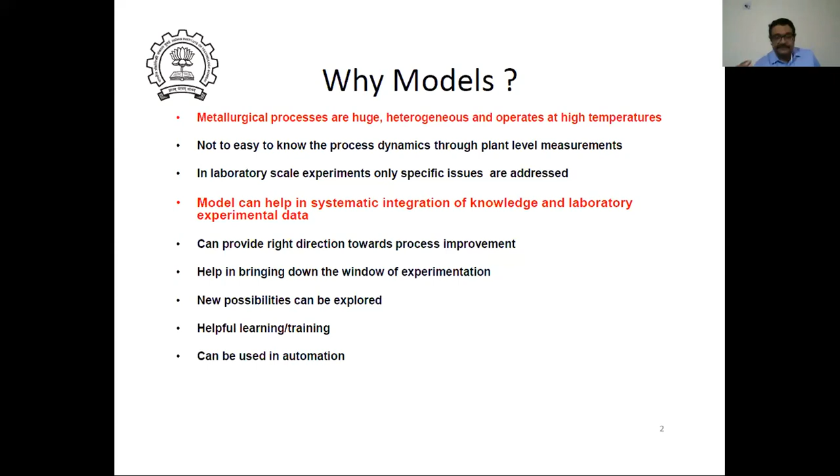That's why there is a very famous chemical engineering professor, Rutherford Aris. He talks about how conceptual progress happens in our brain as we make a model, and then the actual understanding about the system improves the system itself. So it's a play between these two, as he says. And this is one of his very important statements.

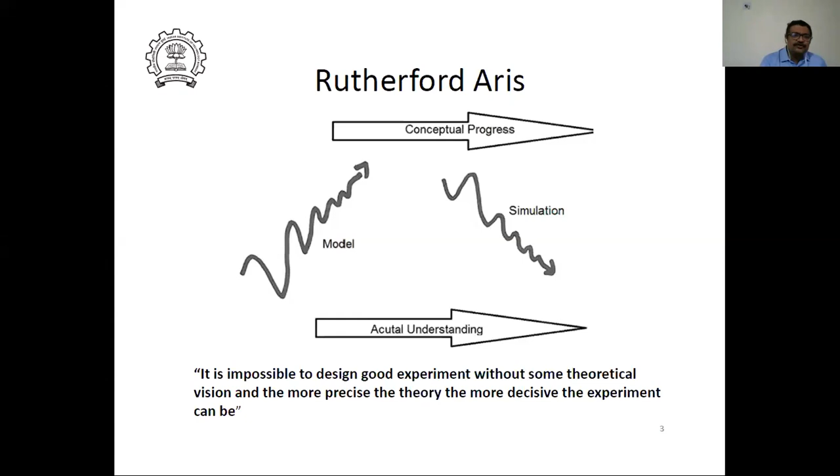He says it is impossible to design a good experiment without some theoretical vision, and the more precise the theory, the more decisive the experiment can be. So if your theory is better, you can actually do a more focused experiment. I will show you some of these things through my presentation.

Of course, he also comes up with his so-called maxims of modeling. He has many of them.

Nowadays many youngsters get into this—we have a lot of tools available, especially CFD tools like ANSYS Fluent, OpenFOAM, or CFX. We would like to simulate many things, especially flow, heat transfer. Quite often a beginner would like to put all the complexities involved in the system into the model right from the first one they develop.

He says that is one of the worst ways of doing modeling—avoid rigor like the plague, it only leads to rigor mortis. That means if you put too many things in, the model becomes so inflexible that it will not move; it will be like a dead body. That's what he means by rigor mortis. So one has to be careful about this.

We have a lot of tools available, but again, when we do modeling, we have to do it step by step. Anyway, these are some of the things I thought I could share before I talk about modeling.

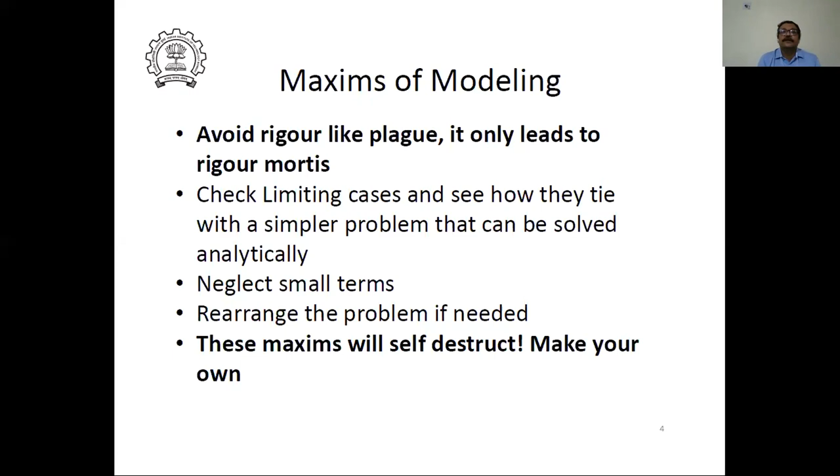As far as the principle used in process modeling goes—this is really what the whole science is about—we have conservation equations and constitutive equations. Conservation equations are, for example, conservation of mass, conservation of energy, conservation of species. Constitutive relations describe how a particular thing behaves.

For example, how does steel behave under tension, under stress? Similarly, how does an iron ore behave when you put it in a CO atmosphere? These are laboratory experiments that can be done, and from there we get the so-called constitutive relation. So basically modeling, in a generic sense, is combining these constitutive relations through conservation equations—using principles of thermodynamics, heat, mass, momentum transfer, and reaction kinetics.

Of course, modeling doesn't only mean computational or mathematical models. We also make physical models to understand things, and information from those can also be used.

Quite often there is confusion between model and simulation. Most of us are probably not modelers—we are all simulators, because somebody has already developed a model and we only use those models to simulate something. So whatever we do in Fluent or anything, I would like to call it more a simulation rather than a model. A model needs much more in-depth understanding.

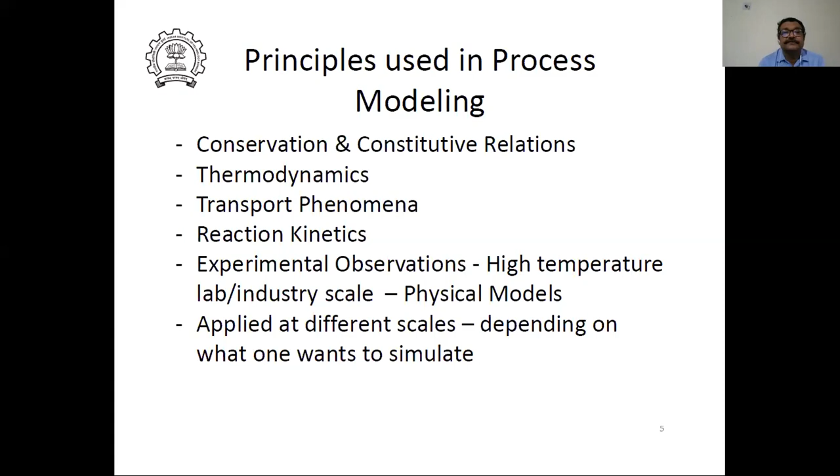But anyway, let me start from pelletization. This is the work I did when I was an LKAB chair professor in the northern part of Sweden, where they have a lot of magnetite ore, and this involves induration—magnetite induration. They make pellets and wanted to look at the process. I don't want to get into the details; many of you will know what a pellet indurator is—you make pellets and then heat harden them.

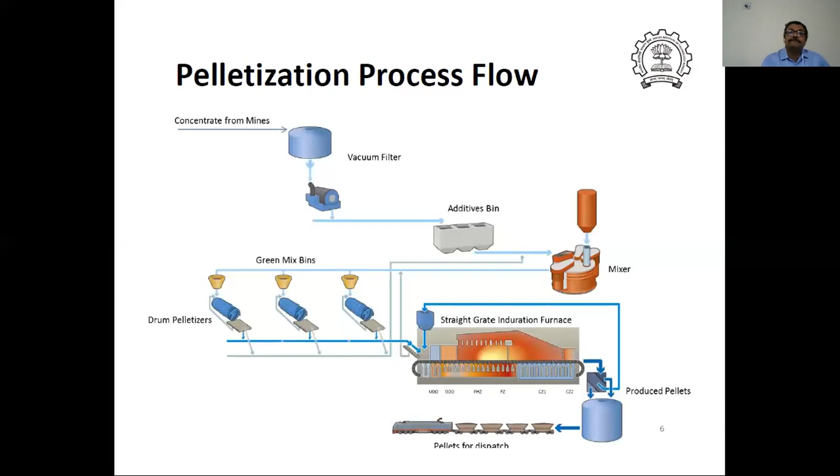So what was the motivation for doing this problem was, if you look at the whole reactor, the induration reactor, there are two kinds of reactors, straight grate and the kiln one. So if you look at...

Because this is actually a moving bed, and the pellets are stacked in a bed like this, the properties of the pellets can vary from top to bottom. The temperature and gas composition the pellet encounters is not going to be the same throughout the whole section of the bed, so the quality of the pellet varies. Of course this is even true for sinter also, the quality of the sinter varies across the cross section for the same reason.

There are already models for the reactor and all those things, but they don't really have a model which can predict the pellet quality. So hence I was asked, as a professor in that university, if I could look into this problem of how to address this quality. Can some tool be developed so that the quality can be assessed? That was their request.

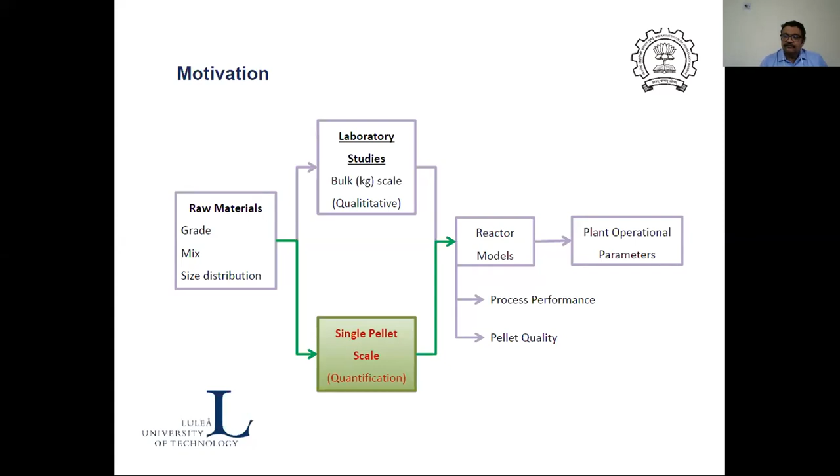So then I said, okay, we have to look into a single pellet to understand, for different raw material mix, different grades, how do you go about understanding the single pellet? That's the way we started working on a single pellet. This was one PhD student who worked on it, so I'm presenting his work.

If you look at a single pellet, magnetite pellet, what we do with the hematite is different, and we have started doing that now at IIT Bombay. I have a PhD student who will be working on that. But on the magnetite pellet, the magnetite gets oxidized, and then it also gets sintered.

Of course, the sintering can happen both for magnetite as well as the oxidized magnetite, which is hematite. Interestingly, the sintering characteristics of the oxidized magnetite is different from the magnetite itself. Rather, what happens if you take a pellet, it starts oxidizing from the outside, and you have an unreacted core which is magnetite. As temperature increases, this will sinter separately, and their sintering characteristics are different.

Magnetite sinters a bit more easily compared to hematite. So sintering leads to shrinking of the pellet. This unreacted magnetite, which is yet to get oxidized, will start shrinking, and the hematite will not shrink that much. So then one can develop a crack in the magnetite pellet inside. Rather, if you take those pellets and shake them, you will hear a sound like a coconut - sometimes you will get a duplex structure.

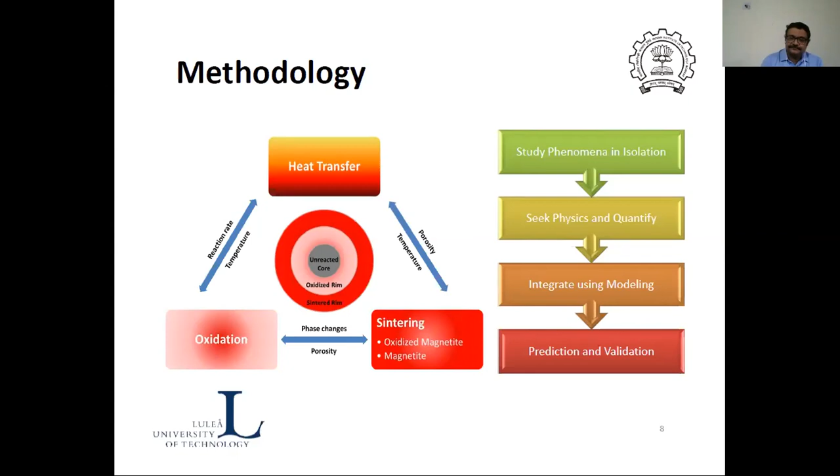So what we did was, we know that sintering leads to shrinkage. So we actually did a very simple experiment called the heating microscope, which I think many of you may be aware of. For example, if you want to find out ash fusion point, you take a small pellet, put it inside that heating microscope. There is a light source, and you get a shadow image, so that way you'll be able to capture how the size is changing, and from there you can find out when it is going to soften, etc.

So we took the same system. Of course, we asked them to make it a bigger system, so that we can put a pellet which is of 10 to 12 millimeter size. So that way we put it inside the furnace, and then you heat it. There are ports, windows, and all those things - you have a light source and capture the image.

As the temperature goes up, the pellet expands and gets sintered. This was done by some scientist back in the 60s or 70s, but afterwards no one continued to use this. They were using another technique called dilatometer push rod, which has its own problems - I don't want to get into it. But we thought this is a much better system, so we worked on this one.

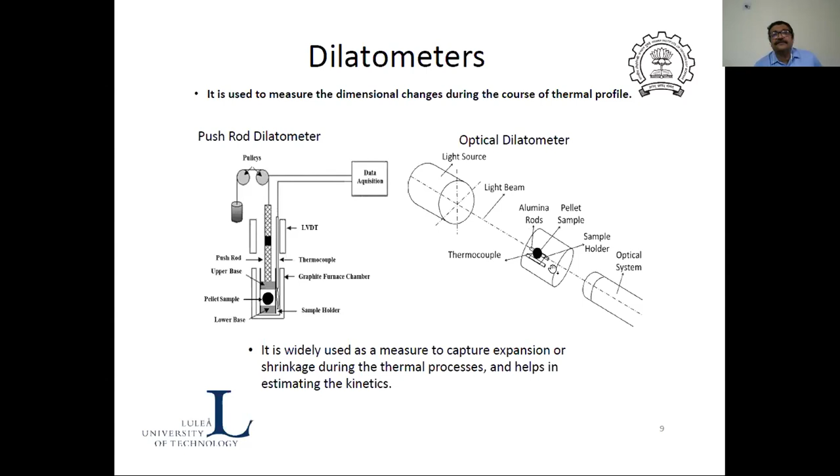Though it is a heating microscope, we call the name optical dilatometer. We have published at least 3 articles in Metallurgical Transactions on this particular methodology.

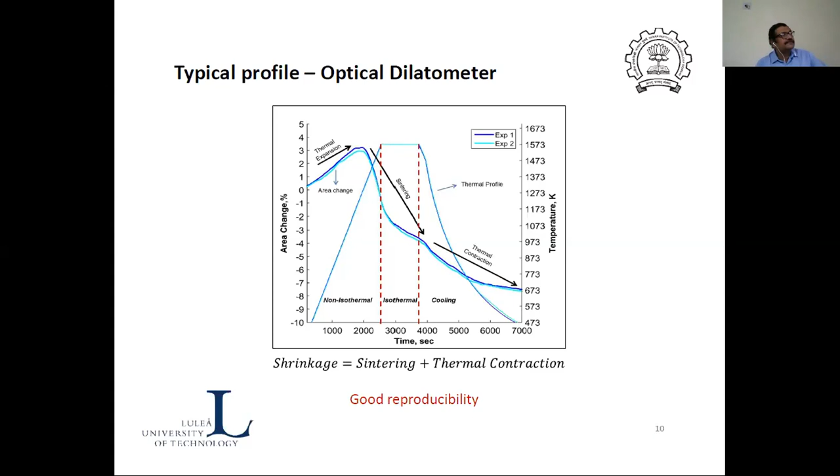So basically, it is a typical curve which we get from the optical dilatometer. Of course, there are two phenomena happening - one is the expansion, the other is sintering. Actually, one can very easily eliminate the expansion, because if you plot with temperature, you will see that expansion is more or less linear with respect to temperature.

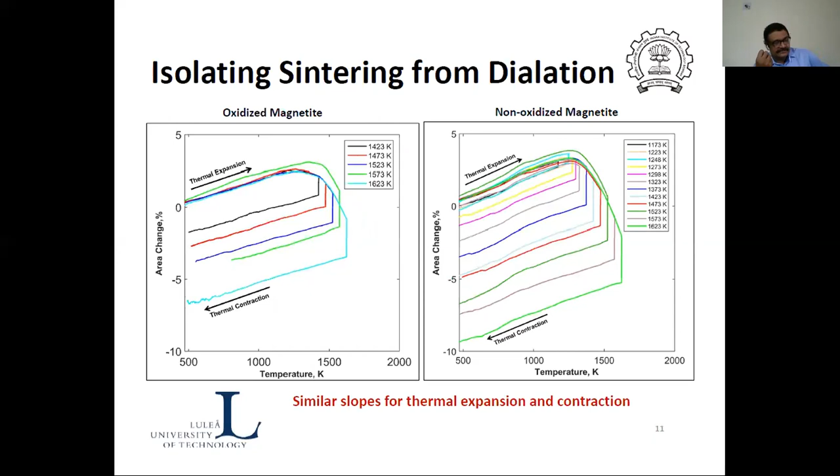So instead of time, I just plot with the temperature. You can see that this is expansion and this is contraction again during cooling. So I can very easily eliminate that, and I can actually get what is the change in the pellet size only due to sintering. And that is what we used.

Sintering is not something uncommon to a metallurgy community. In powder metallurgy, a lot of studies have been done on sintering - they have done so many experiments. They use a parameter called sintering ratio. Again, I don't want to go into the details of it, but this can be derived out of those experiments.

We conducted experiments for different temperatures, both for the magnetite as well as oxidized magnetite. When we oxidize the magnetite, we don't want sintering to happen, so what we did was oxidize it very slowly - meaning at a low temperature where sintering will not occur. We kept it for 2-3 days in the oxygen atmosphere so the magnetite would completely oxidize. We checked it - completely oxidized.

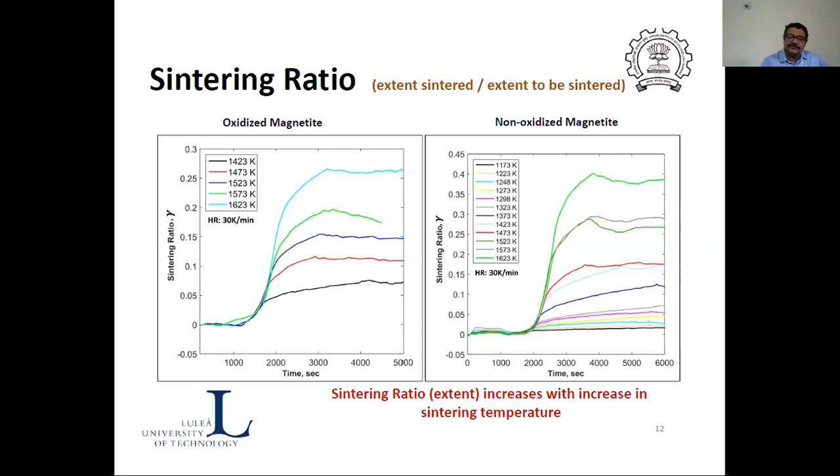And then on that pellet, again, we conducted the sintering studies. So these give us the sintering ratio. And then again, we looked at powder metallurgy literature. There were actually very nice equations which describe how the kinetics of sintering can be - of course, metallurgists would have studied in powder metallurgy the different stages of sintering, the different mechanisms, and all those things.

But as far as iron ore sintering is concerned, we are only at the first stage because we want the pores to be there. So it's basically the first stage of sintering, but in actual powder metallurgy there are more stages. All these equations were already developed.

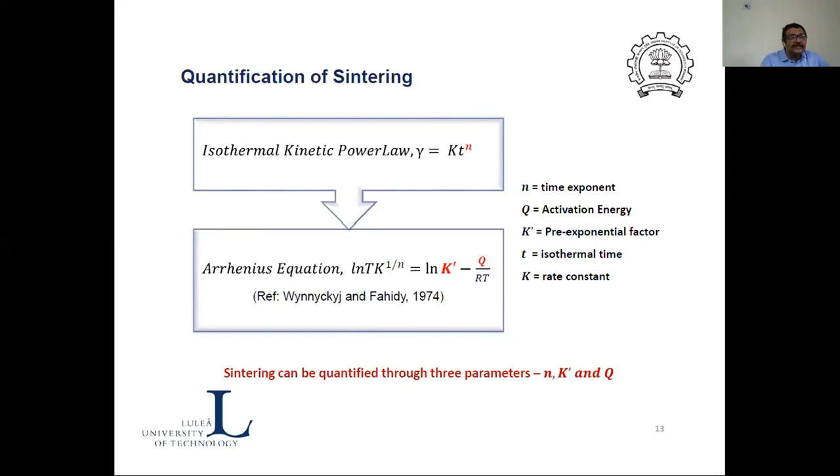The most striking thing was when we just put all that equation together, we saw that all those experimental points beautifully converged into one line, which clearly showed something. This was the moment we were so happy - we could see that, borrowing from our friends in powder metallurgy, we could actually quantify sintering.

Till now, no one was actually quantifying sintering in pellets. That was the sad part of it, because people did not look to quantify the sintering. And we could see that it was so beautifully coming in one line.

Of course, then we analyzed what is the activation energy, what are the reasons for it. Academicians have their own reasons to find - for example, Fe3O4 sinters much more easily compared to Fe2O3. That is one of the reasons - Fe3O4 is a non-stoichiometric compound, so it has more defects in it, and hence diffusivity is higher, so it can actually sinter more easily compared to hematite.

So some of these insights were coming once we started doing these experiments. This was a very nice experiment, and we could actually quantify sintering. Now what is the use for industry? Industry is basically - we have come out with some kinetic parameters.

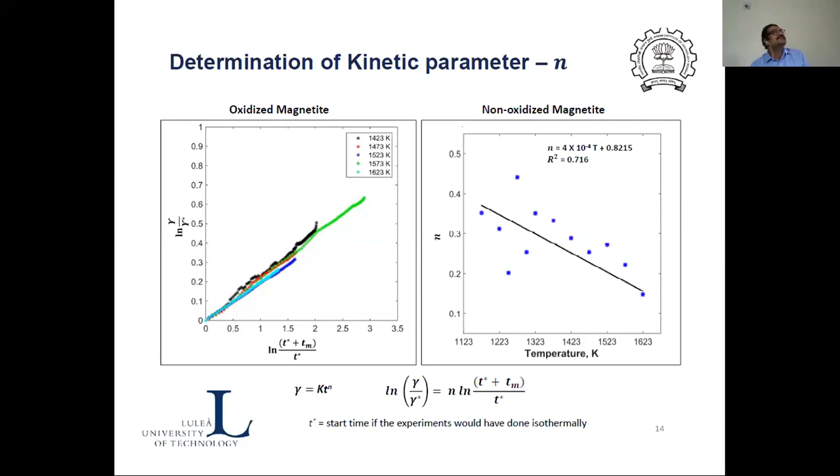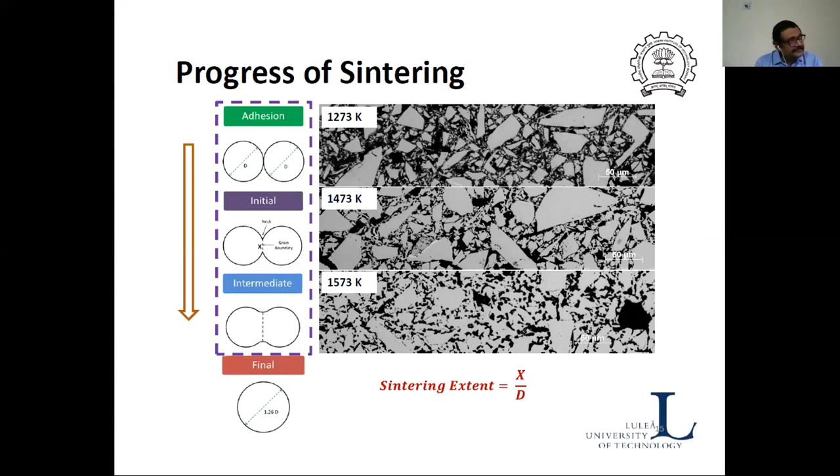Of course, we also analyzed the microstructure and all those things. As I was telling you, this is the neck formation in sintering, which in powder metallurgy is well known. So we analyzed the microstructure and looked for bridges. We had a collaboration with a computer science professor who works in image processing.

What we did, for example, this is the image of a single pellet, but actually it is not one image. This is several thousands of images stitched together, and we obtained the whole picture. From this picture, again looking at the bridging and using image processing, one can find out what the sintering degree is. So we saw that what we physically observed by shrinking can actually be correlated.

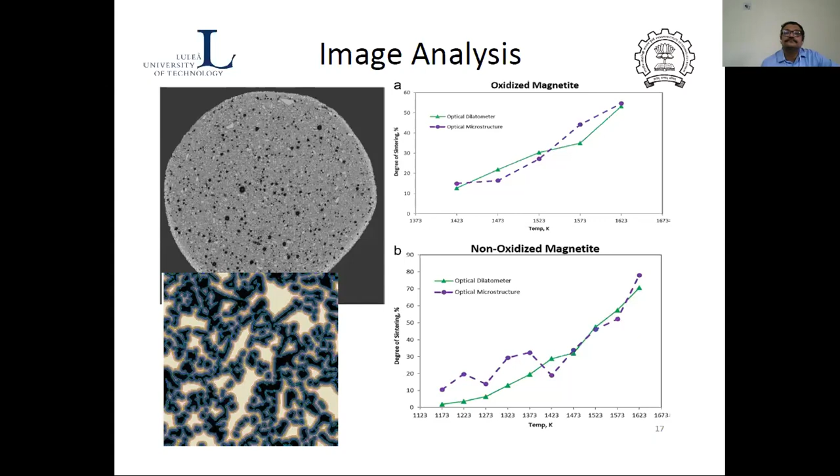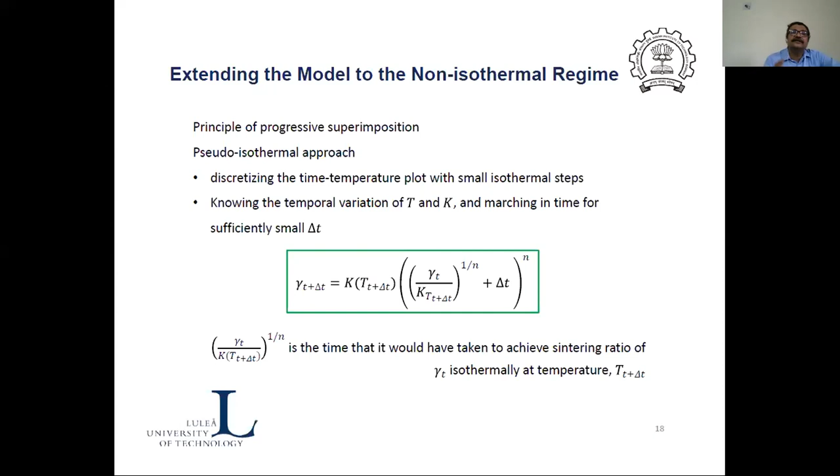Then we expanded this model, because all the studies were conducted in isothermal conditions. So we expanded the model to non-isothermal conditions. Of course, these involve some modeling techniques, but they are not very difficult things, and they are used in many other places. For example, in grain growth, when you do runout table processing, if you want to predict the microstructure, there are equations available.

Along the same line, we developed the model, and we conducted non-isothermal experiments to see how good our predictions were in matching with the experiments. You can see these are some of the predictions, and the experimental results, and it's a very nice match between what we found experimentally and what the models predicted. So it's a judicious combination of experimentation, especially focused experimentation, that can give much better information and result in quantitative information.

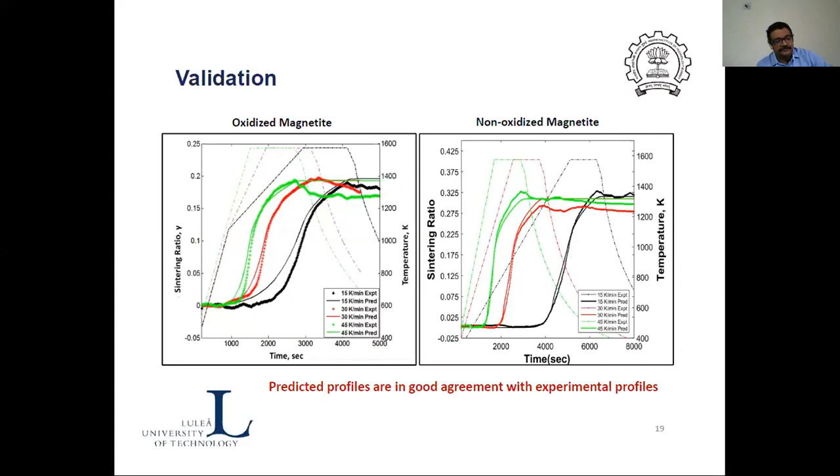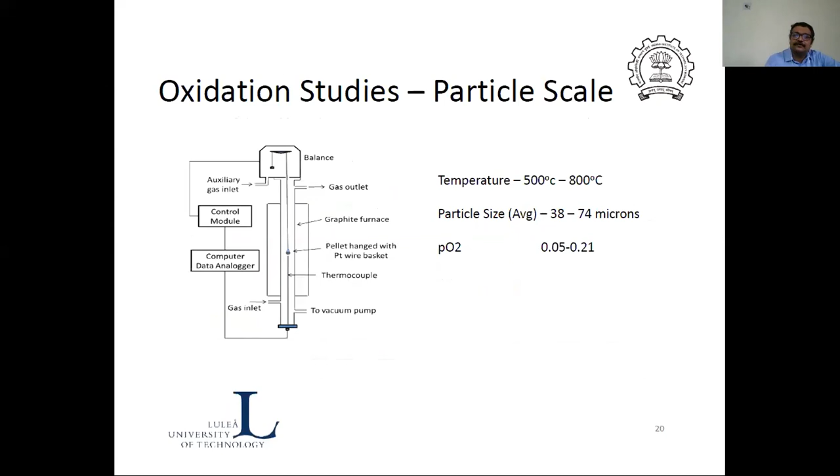This is one part where it is only sintering. Then we also went ahead with oxidation, where we conducted TGA experiments. I don't want to go into the details, but we did all those studies also. We looked at single particles of magnetite, which are there inside the pellet, and we looked at the microstructure.

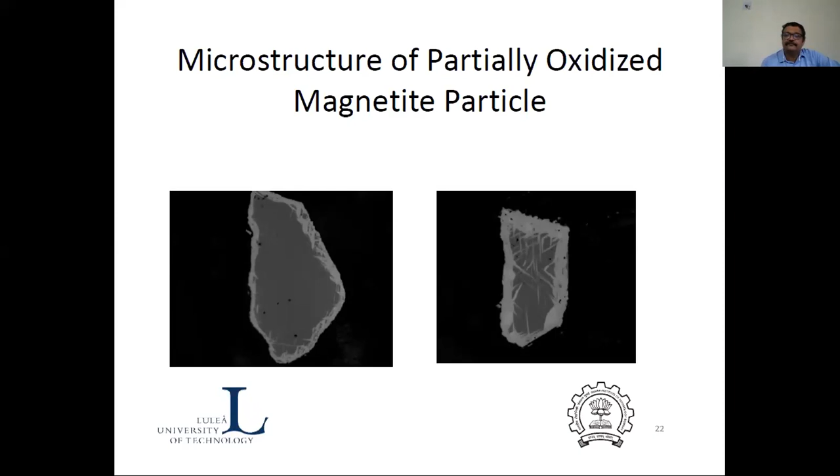For example, this is the way hematite grows, the needles of hematite coming in. So again, we used principles from phase transformation to understand this, and there is something called the Avrami equation. Some of you may be familiar with it, and we found that the Avrami equation fits very well. Again, these are experimental observations fitted with the Avrami equation.

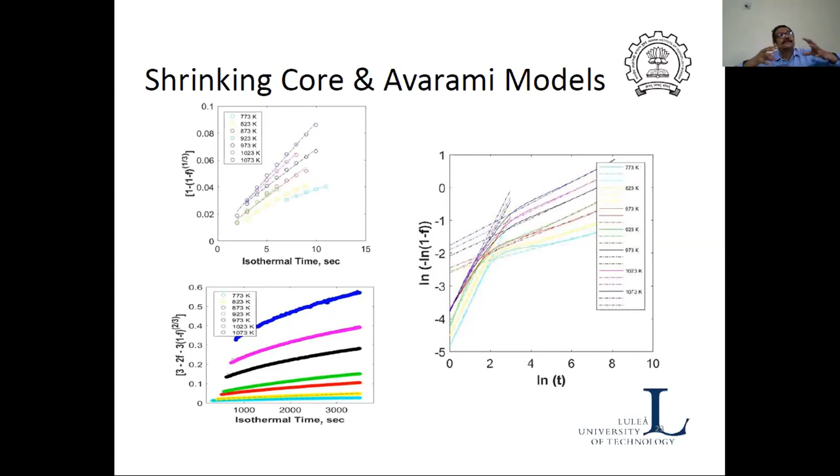So that way we were going across different scales. One is the scale of the grains which are there in the pellet, then the pellet scale where diffusion happens, and at the grain scale, this phase transformation or oxidation was happening. So again we used the principles of diffusion, reaction kinetics, and conservation, and then we could develop models.

So for example, this is the model versus experiments, and it's a very good match. That way we could quantitatively predict the oxidation, and we could quantitatively predict the sintering. So that way we studied the phenomena in isolation.

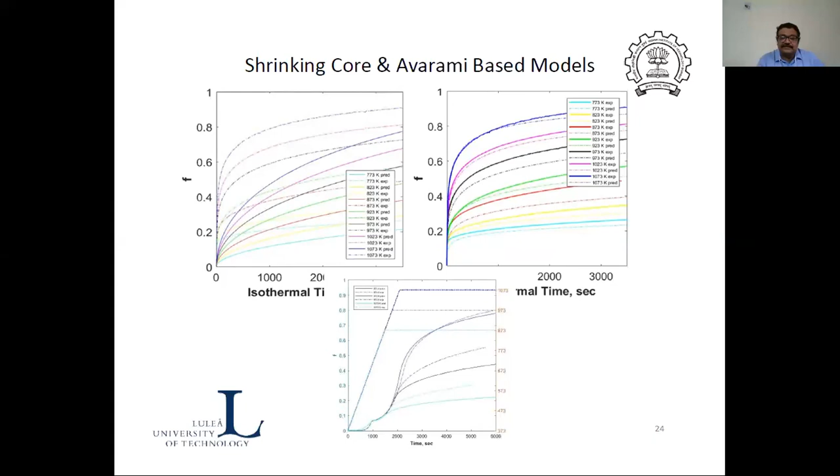Now we can combine these two, because sintering affects the oxidation - once sintering happens, the voids get closed, so the gas cannot reach. And of course, depending on whether it is magnetite or oxidized magnetite, the sintering is going to change. So oxidation gets affected by sintering. Hence now, once we know them in isolation, we can use the principles of modeling to integrate them, and that's what we did. And there is also an associated heat transfer, so now using the principle of modeling, we can actually predict.

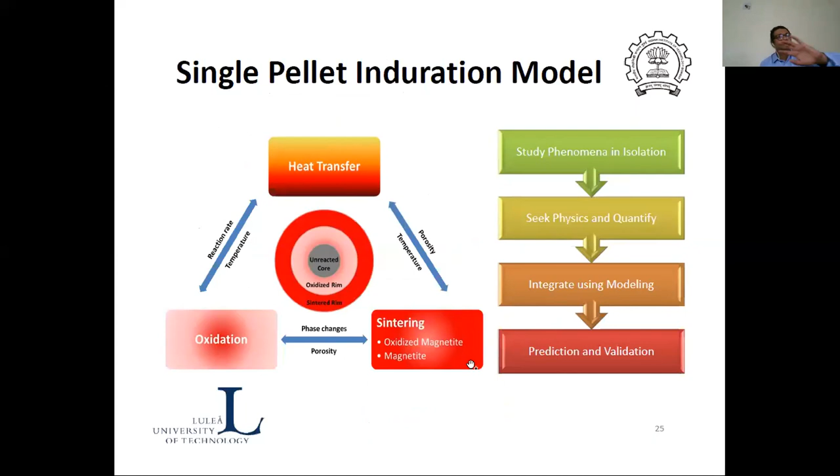If you look very carefully here, this is how the oxidation progresses. You can also see the pellet shrinking. If you look at the pellet here, and by the time it has come here, it has already shrunk. So we developed what is known as SPIM, the single pellet induration model.

LKAB is using this SPIM model in their actual reactor model, so they can predict the quality of the pellets across the cross section. Of course, they have to conduct experiments whenever they have a new mix to find out the kinetic parameters. Once they find the kinetic parameters, they plug those values into the model and put it into the reactor scale model. That way they can assess how much shrinkage has happened, what the oxidation front looks like, and from there assess the quality of the pellet. So some quantitative information they are able to get from this model.

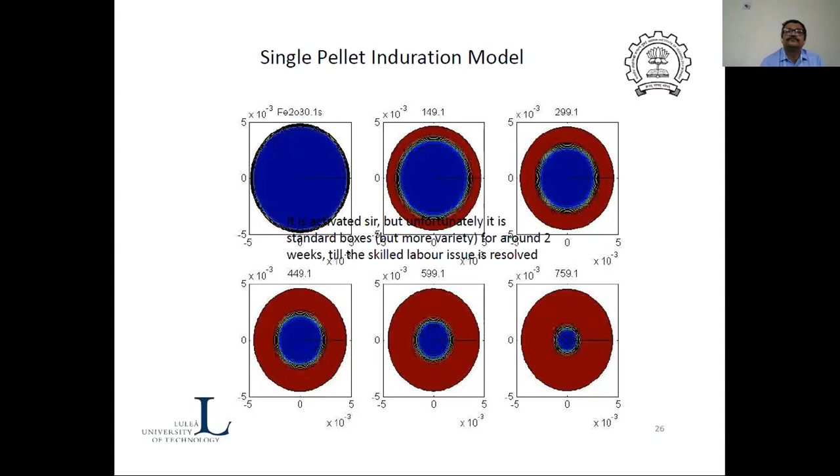So that is as far as LKAB is concerned. I was not involved in the reactor scale model. Then I came back to IIT Bombay, and here I was very much interested in pellets.

We always have students coming from industry who are interested in various iron and steel making processes. So I got involved with one of the industries who wanted to look at the temperature profile in a straight grate induration furnace. Of course, this is not a magnetite induration, but a hematite induration furnace.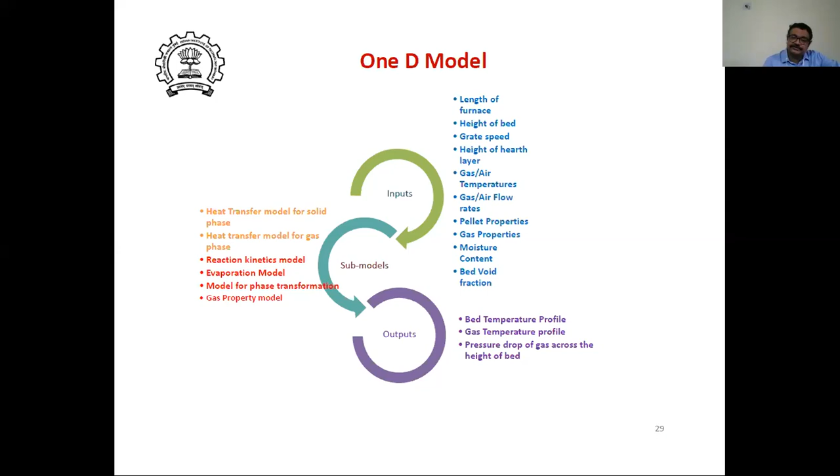From there we can predict the bed temperature, the pressure profile, and all those things. For example, this gives the temperature profile. Because the hot gas comes from the top, the pellets on top spend more time at high temperature compared to the pellets at the bottom, which spend relatively less time at high temperature. The residence time is different for these pellets versus those pellets, so accordingly the quality is going to be different for a pellet here versus a pellet here.

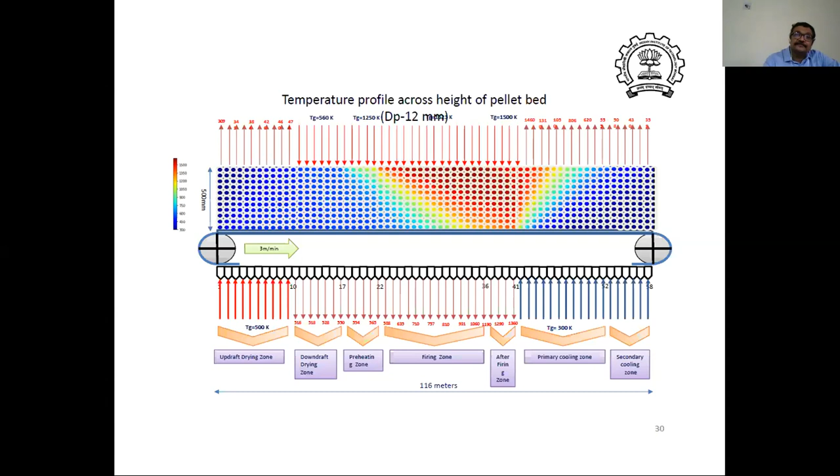The most interesting thing we got excited about, which I am not able to show but can tell you, is the temperature profile for different pellets - those sitting at the top versus the middle versus the bottom. As it moves, a pellet at the top experiences a different temperature than a pellet at the middle or a pellet at the bottom. So that's the temperature profile.

Then in industry, they use a technique called thermocar. What they do is put a thermocouple, and not only a thermocouple but also a data logger, in one of the pellet cars. This whole system has to move through the entire induration furnace, so it's a very costly setup because they have to make sure the data logger is well cooled - otherwise at these temperatures it will not work. So it's a sophisticated system with a lot of cooling arrangements.

So they put this thermocouple plus data logger system into the car, and by the time the car comes out, the data logger can be taken out to see what the temperature profile was.

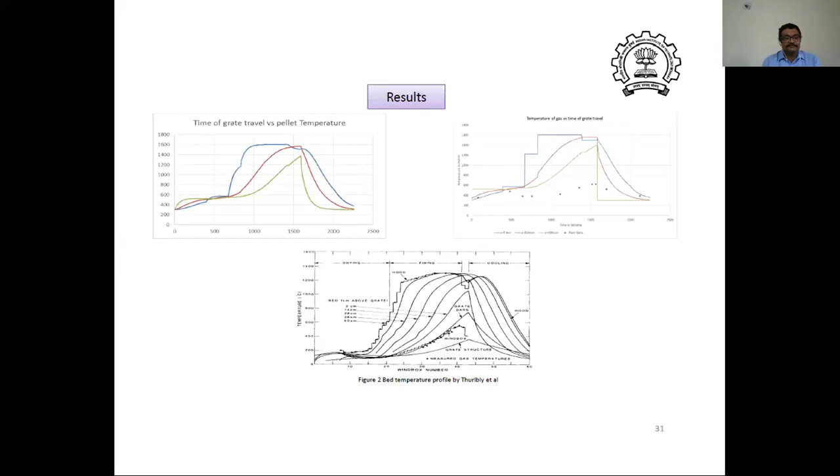So this one experiment cost around 60 lakhs. Plants sometimes do these kinds of experiments to understand the temperature profile inside the furnace. For reasons of confidentiality, I can't show those points, but whatever we did, without even much tuning, the temperature profile matched with one of these profiles so nicely. So now we have established the confidence that the model can predict actual plant temperature data. Tomorrow if I change the gas flow rate, the gas temperature, or the production rate speed, how those things affect the system can be studied with a simple model. Once we establish that confidence, it can be used often and save a lot of money, because doing experiments at such large scale can be quite expensive. We were quite excited to see that it matched well with the experiments, that too at the plant level.

So that is as far as pellets are concerned.

How much time do I have? Still half an hour, sir. Still half an hour? Okay.

So now let me go to the next topic, which is blast furnace. Blast furnace has been my love.

I wanted to do even my PhD in blast furnace, but unfortunately during my PhD there were a lot of issues with cupolas. Maybe some of you may not know, at that time a lot of cupolas were closed because of pollution and such issues. So my supervisor asked me to work on cupola. Probably that is the last PhD work on cupola in the world.

I worked with Professor Lahiri, again a pioneer in modeling, at the Indian Institute of Science. So that way I wanted to work in blast furnace, but I started with cupola. But my love for blast furnace did not leave at all, and as soon as I joined IIT Bombay I started working on blast furnace. And I continue to work even now on blast furnace.

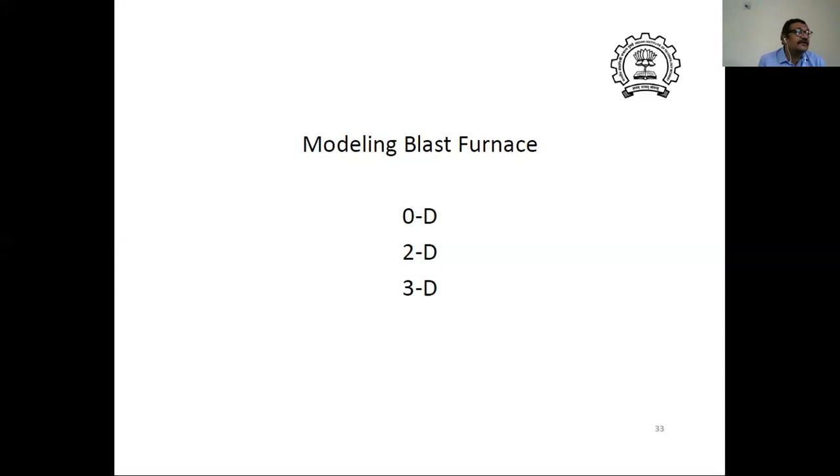So let me start with the 0D model. I don't know how many of you are aware, but one of the great books to study blast furnace, to understand blast furnace, at least from my personal recommendation, is the book by Peacey and Davenport.

It's a beautifully written book without any ambiguities regarding blast furnace. If you look at it, blast furnace has been challenged by many reactors. But let me tell you, blast furnace has stood the challenge of time, and even now, blast furnace will remain as the main iron producing unit, though people are trying different ideas, and there are reasons for it.

Blast furnace, one of the words we use to describe it is chemically and thermally efficient reactor. These are the two words which describe blast furnace, and they are used for a particular reason.

Why it is thermally efficient is that gas is going from bottom to top, and the solids are coming from top to bottom. When you have such a flow, the heat transfer is maximum when both phases reach the same temperature, because after that it cannot transfer any more heat. In blast furnace, such a region exists, which is called the thermal reserve zone, where both the gas temperature and the solid temperature reach the same. That way, it is a thermally efficient reactor.

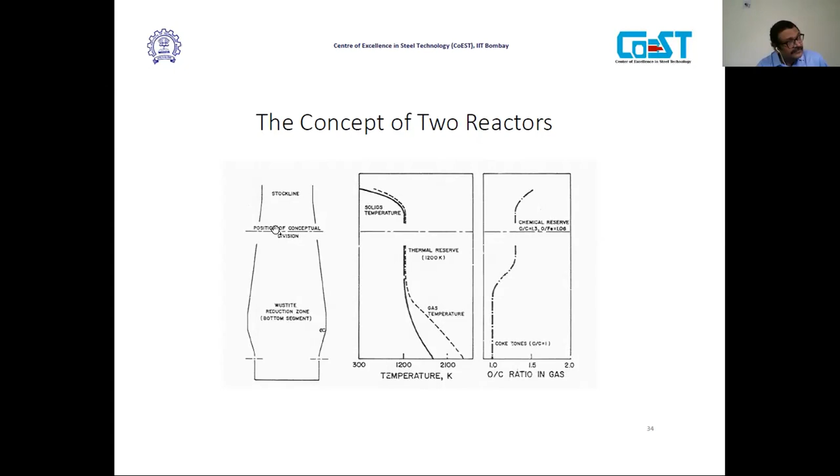Based on that, one can find out, once you have the raw material, the coke you are putting, the PCI you are injecting, other than PCI, hydrocarbon, natural gas, all those things, then what is the minimum coke which is required. That means no blast furnace can operate with less coke for other conditions being fixed, meaning blast temperature, pulverized coal injection, all those things are fixed, and corresponding to that coke rate, what is the blast rate. It's a beautiful, very simple model.

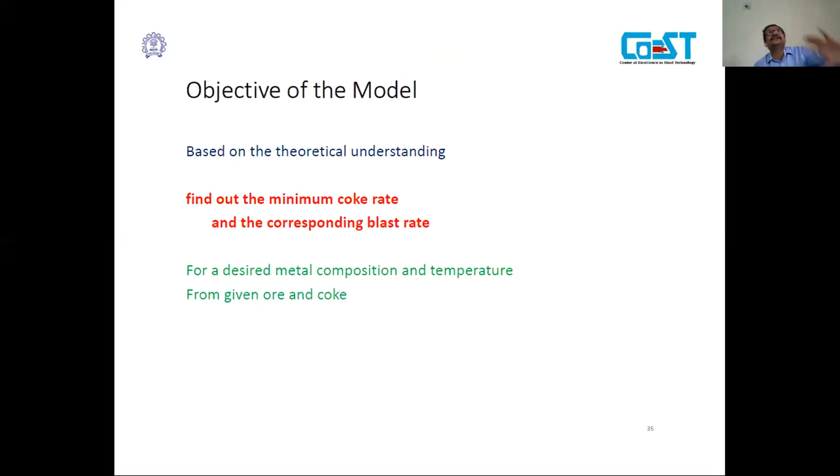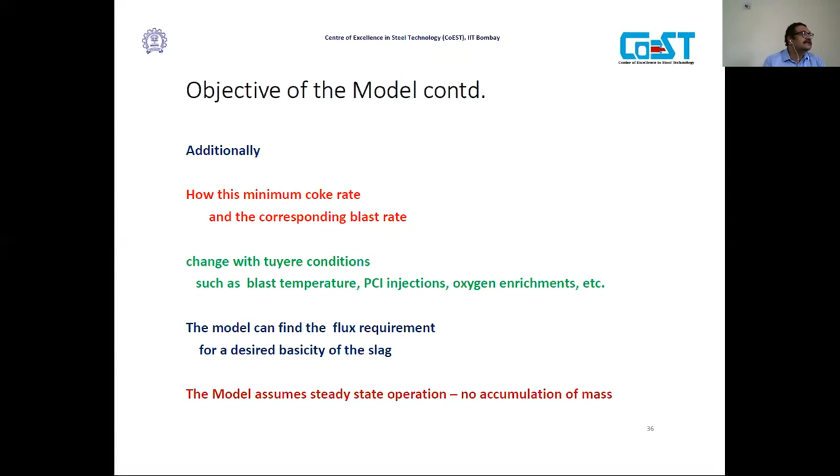This is what Peacey and Davenport's whole book very nicely tells about. I don't want to again go into the model details, but I can tell you, basically the model contains three things. One is oxygen balance, for example, oxygen coming from iron plus oxygen coming from the blast, water vapor, whatever you add, all those things should be equal to the oxygen which is going out through the gas. That's an oxygen balance. There is a carbon balance and there is a heat balance.

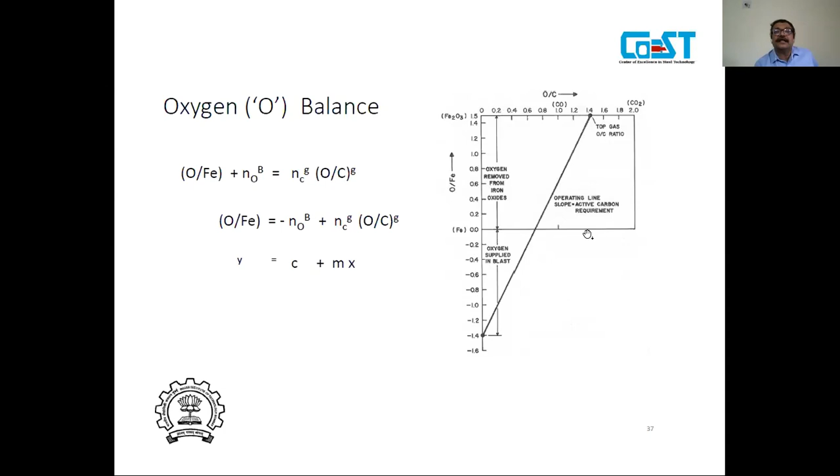Based on that, you can draw what is known as an operating line. This is the oxygen, and this is the oxygen by carbon which is in the gas. This is the oxygen we are giving through the blast, this is the oxygen coming from the ore, and this is the oxygen going out through the carbon, and you can beautifully draw a line. I'm not going into details, but telling you such a simple model, we teach it in the classroom. Students all do it, and we can draw this theoretical line, then based on your top gas composition, what is the oxygen you put in, you can draw another line.

The deviation from this line will give you the efficiency of the blast furnace. How efficient? I can tell you, blast furnace can operate at 95-96% efficiency, almost close to ideal condition.

Now, if I look at many industries, they compare their blast furnace fuel rate or coke rate with furnaces abroad. Actually, this is a very wrong way of comparing. It's like comparing apples and oranges, because the fuel rate depends on the raw material you charge. Our iron ore contains a lot of alumina. To take care of alumina, we add extra quartz, and to take care of extra quartz, we need additional lime. So our slag rates are much more than what is there abroad, in some furnaces outside. So straight away comparing, our coke rates appear much more than their coke rate.

No, we don't need to reach there — I think that is the wrong way of doing things. We need to use these kinds of models, because you cannot get a coke rate better than what this model predicts, since you cannot violate thermodynamics. So your benchmarking should use this, rather than just benchmarking with somebody else's coke rate, because they get much better ore, so they can do it.

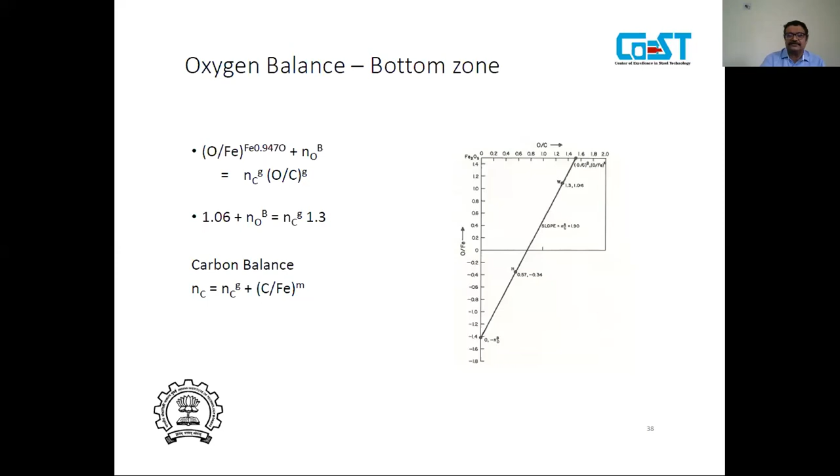This model is something which, I know, ArcelorMittal uses regularly. To some extent, Tata Steel uses it, but I don't think other plants are still using it effectively. This is not a new model — it's as old as 40-50 years. That's what I'm trying to tell you. But still, even though it's a very simple model, we are not using it, and we can do many things with it. For example, this is the ideal line, this is the operating line.

You can also include not only carbon but also hydrogen, because nowadays we are very much interested in using hydrogen, to bring down the carbon emission level. So we would like to put hydrogen-containing things — for example, India may start using more natural gas. I don't know, but these are the possibilities, because we are thinking of natural gas terminals on the eastern coast and the western coast, from where natural gas will be pumped.

These are some of the ideas floated by our Prime Minister, and I know some large companies are interested in it. For example, I myself am working with ExxonMobil, one of the largest suppliers of natural gas. They are interested in finding out the maximum amount of natural gas which can be injected into the blast furnace under Indian conditions, given whatever iron ore, coke, and PCI we get. I can analyze all these things using this particular simple model.

What is the maximum amount, and how much will carbon emission levels come down? All these things can be analyzed — so I'm working on it. Again, I'm not allowed to show some of those results, but I'm trying to tell you it's a beautiful, very elegant model, which I think all plants should be using to look at their blast furnace performance on a regular basis.

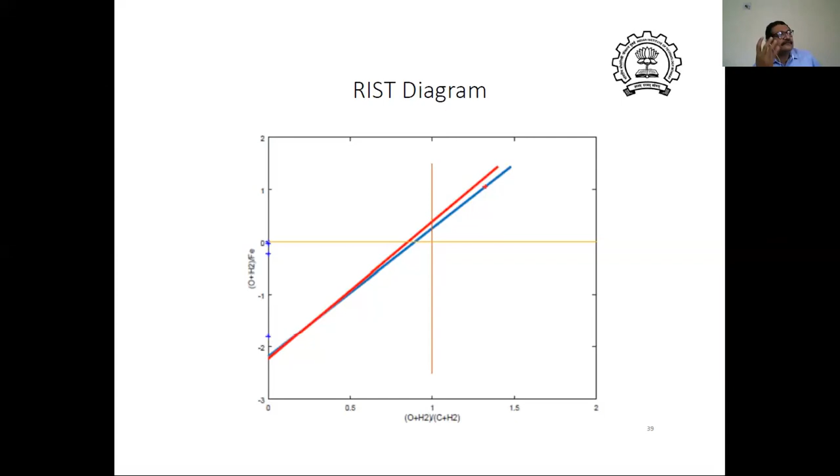So this simple model can be used to benchmark blast furnace efficiency, explore new possibilities, as I told you, and even to look at top gas recycling.

Let me also tell you about one idea from IIT Bombay Professor Ballal — there were some experiments done in Europe to recycle the gas back, since it contains 20% CO and 20% CO2. The idea is to remove the CO2 and put back the CO into the furnace so that your coke rate, the carbon rate, can come down. This is actually the reason I went to the north of Sweden, because they have an experimental blast furnace there.

They have installed this recycling facility there. So I could interact with those people there, and it was such a wonderful experience.

Anyway, so we have to work on new ideas also ourselves. Especially India has become the second largest steel producer. We have also signed the Paris Treaty, where we'll bring down, from 2005 levels, some 30% by 2025 or 2030, I think. So we have made such commitments. If you want to do all those things, we have to bring down our carbon emissions and try out new techniques.

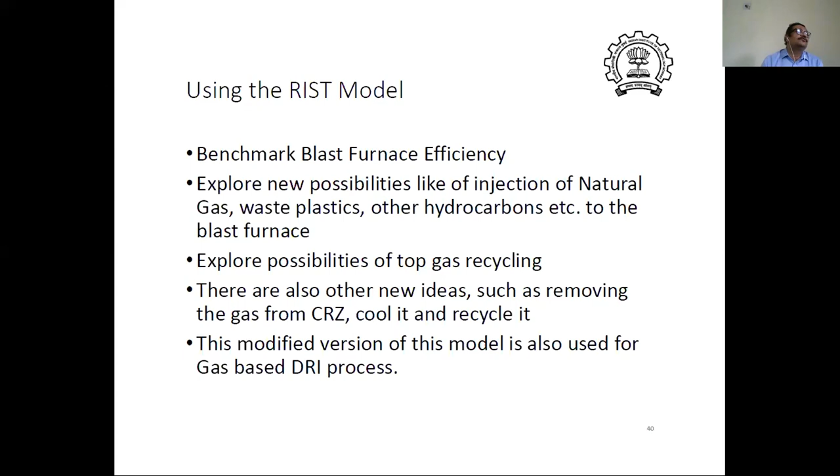Just ideas coming out is not sufficient, they need to be tested. That testing needs a lot of money, especially for these kinds of reactors, somebody has to put in money and try out these things. Only then is it possible to come out with technology. Some academician sitting in an institute giving ideas and trying things out on paper is not sufficient, that is only a beginning. There need to be further people working on it to make it actually a process. So it takes a lot of time, effort, as well as money. We should be ready to do that. Then only can innovations, at least in iron and steel, come about.

Then my journey to blast furnace simulation continued. I had a PhD student who worked completely on it, he wrote all the codes to develop a 2D model.

Let me tell you, when it comes to blast furnace, you cannot use all these commercial codes. It's very difficult to use them because so many reactions happen, there is melting, so many things happen, and all this flexibility is difficult to capture. Not only that, if you look at the flow of liquid steel through a tundish or anything like that...

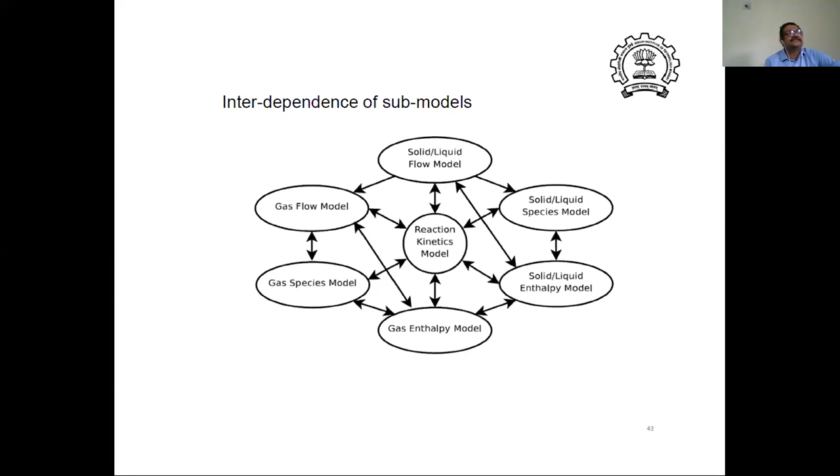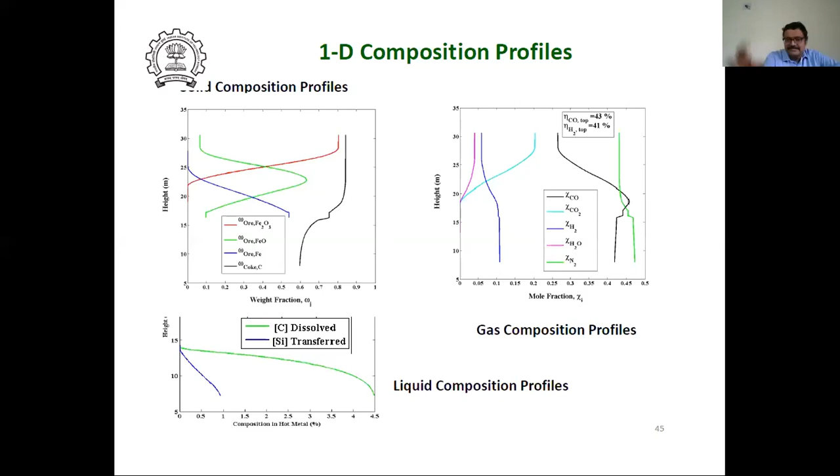Then an opportunity came because Tata Steel was well aware of all these developments. They had been interacting with us very closely. So then they came, I'm not going into the details. We developed 1D, so it was 0D, 1D, then we went to 2D. That was our journey. As I told you, you develop models in steps, you don't jump straight to a rigorous model.

So Tata Steel came to us, and we said at that time there was already another open source software called OpenFOAM. I don't know how many of you are aware of it, it's an open source CFD software with a completely different philosophy, where all the codes are available, and the flexibility it offers is so high.

Then there was a company in Pune called Tridiagonal Solutions, who were experts in OpenFOAM. So we had a tri-party collaboration, where we had the vast experience of so many years of working in blast furnace modeling, all the equations and difficulties were with us. Tata Steel had experience of all the operations, and many of my students who worked on blast furnace are now in Tata Steel, many of them.

And then Tridiagonal Solutions. I can tell you, we worked very hard for 18 to 19 months, and that resulted, basically, when we have such tasks, we have to respect each other's expertise. This collaboration is something I believe in India we need to learn, from many other countries, where industry, academicians, and other expertise all have to come together and work towards a common task. It is not just one person or one organization, it cannot be that way.

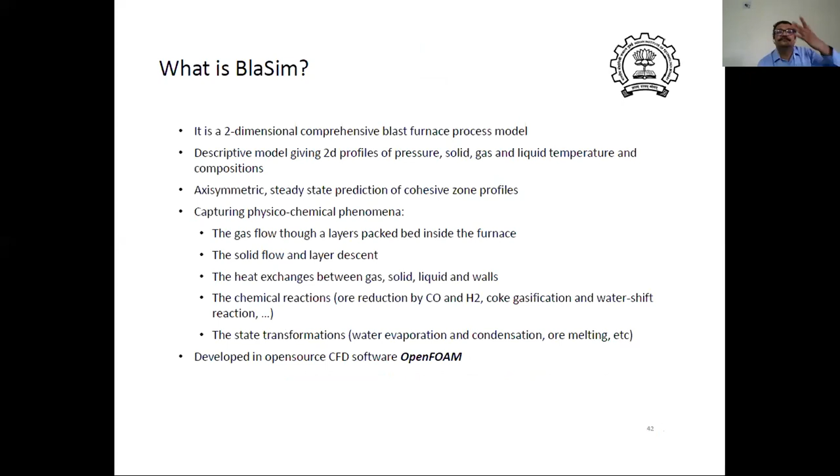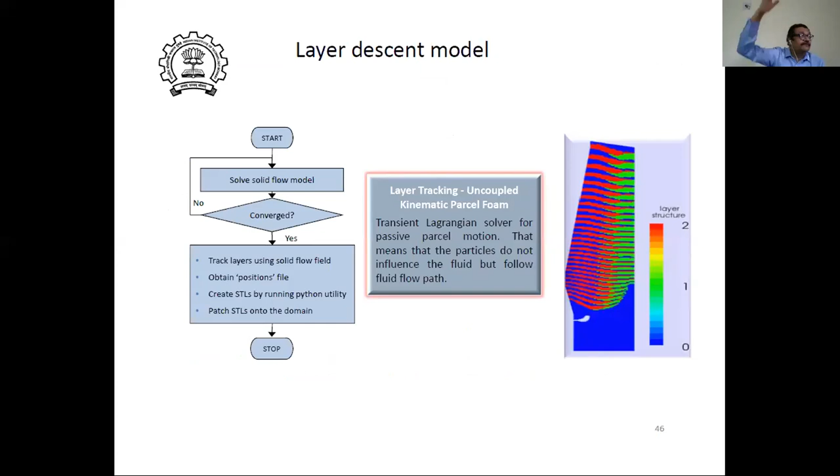For example, once you have a charging model from the rotating chute, it shows how the burden is going to descend. We even compared this with plant data, and it was a good comparison. Again, I'm not going into the details of the modeling.

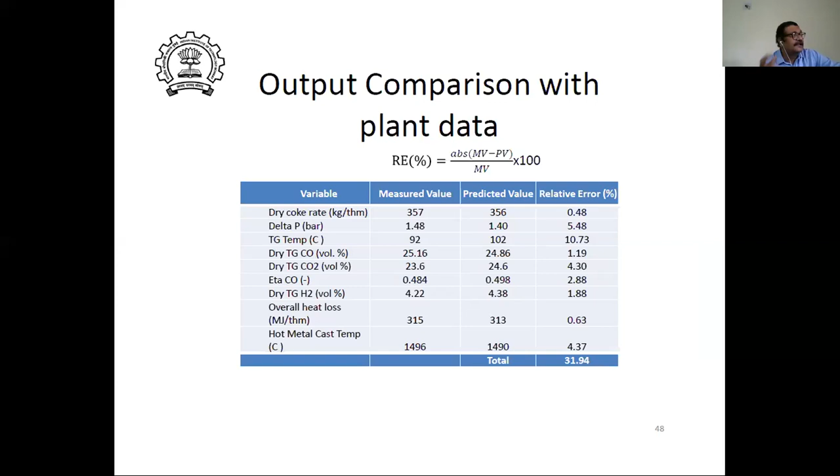It's a very complex model. A lot of things are involved: reaction kinetics, heat transfer, flow, melting, liquid flow, all of those things. And it can predict, which is what I wanted, the cohesive zone in the blast furnace, which is very difficult for an operator to know.

To some extent, operators try to get it from the stave coolers, from the heat flux data, to assess the location of the cohesive zone. But this affects the quality of the hot metal, because how much time the metal spends below this cohesive zone determines the silicon content and other factors. Blast furnace performance is greatly affected by this, and that also depends on the charging and burden distribution.

So we could actually predict, for different operating parameters, suppose I increase the blast rate, will the cohesive zone move up or down, and by how much? For many of those things, you can at least get the direction and an estimate.

Let me tell you, this model cannot be used by an operating person, it's for a process engineer. This is something our community and our plants have to think about, where the operator has to be different from a process engineer, someone who analyzes the process both from the theoretical angle and from actual operation.

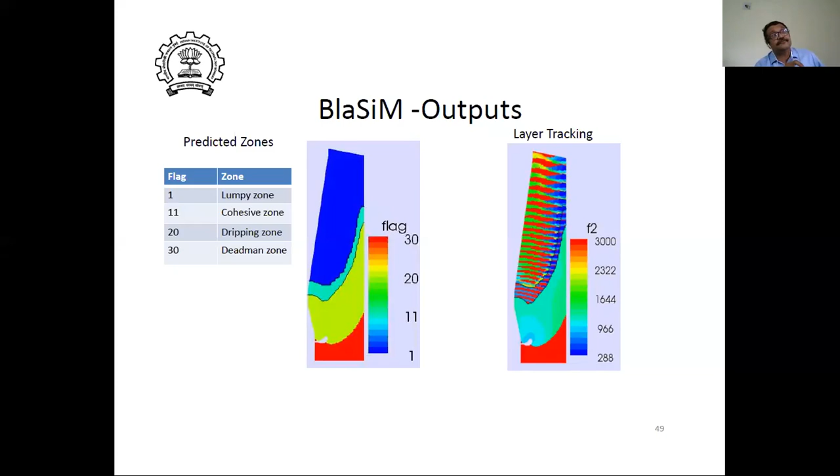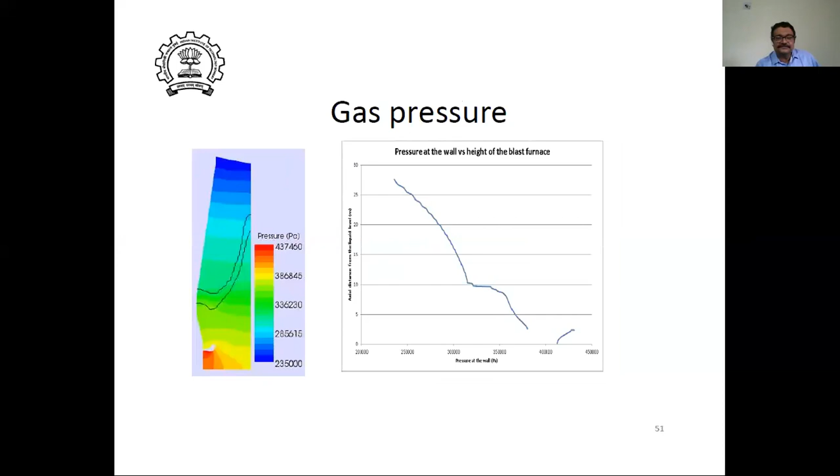The 0D model I was telling earlier, the Rist model, can be useful to the operator. That's why I said, depending on the objective, it will change. This can predict many other things - what is the wall pressure profile, what is the temperature, what is the liquid temperature.

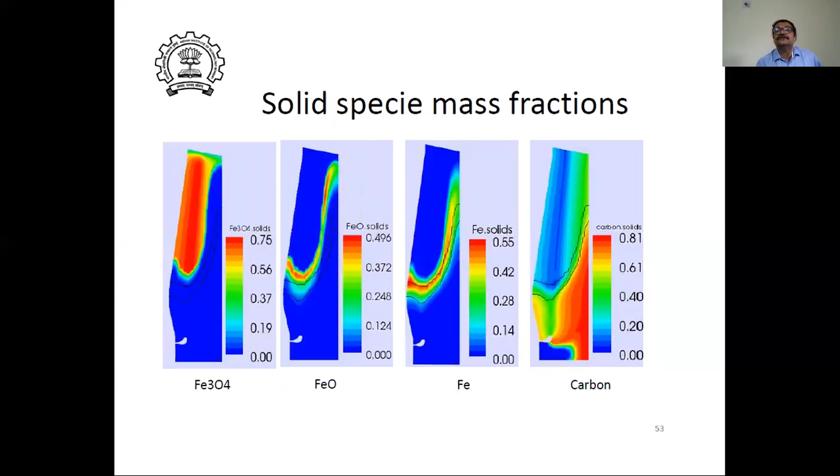Fraction, reduction, all those profiles it can predict. Now, of course, the model is with Tata Steel. They are the owners of the model. I was only a collaborator.

So maybe I can go to one more case. Do you have time? Yes sir, please, by 12 o'clock. Okay, fine. I can stop for discussion also, it is up to you. As I told you, I can stop at any time. So let me spend maybe another 5 minutes on this.

This is something interesting which we are doing experiments also - very fundamental experiments. So these are far away from the industry, but still it has a lot of relevance.

One of the difficulties in modeling a blast furnace is below the cohesive zone, where you have coke, and liquid meaning metal and slag, and gas going up. Industries want to push the production. There is always - once you try to increase the production, your efficiency will come down, your coke rate will go up. That is true for all systems. When you want to do things faster, your efficiency will go down.

But there is also a difficulty in pushing the furnace beyond a particular point, because the liquid is coming down and the gas is going up. As you increase production, more liquid is produced while gas is going up, so it offers resistance because more liquid is coming down. Then the pressure drop will increase, and the operator will say the furnace is not taking the wind. Beyond a particular point, you start getting all kinds of problems. So this particular zone, especially where liquid, solid, and gas interact, has an issue.

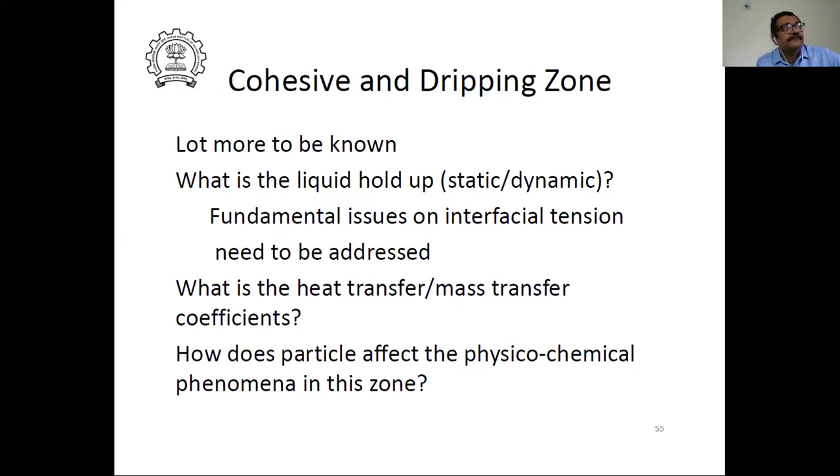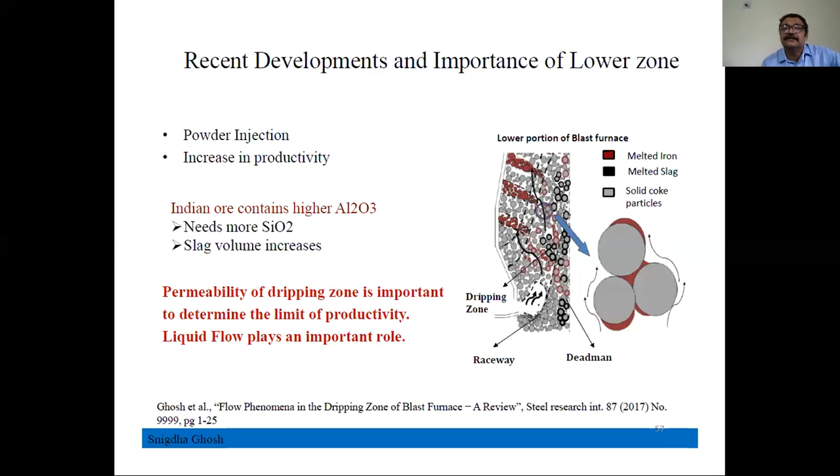This is one aspect of it - that's why it's called the dripping zone. In modeling we had a lot of difficulty and had to do a lot of tuning in this particular zone. So we wanted to look at this zone in a more careful, fundamental manner. There's also something very nice - this work was done by my student Snigdha Ghosh, who will soon be faculty at one of the IITs. Let me tell you about experiments done by chemical engineers long time back.

You take a bed of particles, pass gas from the bottom, spray liquid from the top uniformly. As you keep increasing the gas flow, the liquid is also trying to come down, but at one point the liquid cannot fall down and it will flood the area. This is called flooding - very simple, can be done even in the laboratory with water and pebbles, just allowing the gas to go up.

There is also another interesting thing. Suppose liquid is coming down and gas is going up from the bottom, and I suddenly stop both the gas flow and liquid flow. What will happen? The liquid will drain, but not all of it, because between the particles, due to surface tension, some liquid will remain. This is called static holdup in chemical engineering, and in blast furnace also we call it static holdup.

Why is it important? It is important in blast furnace because the slag is much more viscous and its interfacial properties are different. Actually, most of the slag reaches the bottom through static holdup - as the coke moves down, the slag moves with it, because there's no relative velocity between the coke and the slag. On the other hand, the liquid metal, which has very low viscosity and different interfacial properties, flows much faster. So the way slag flows is different from the way metal flows.

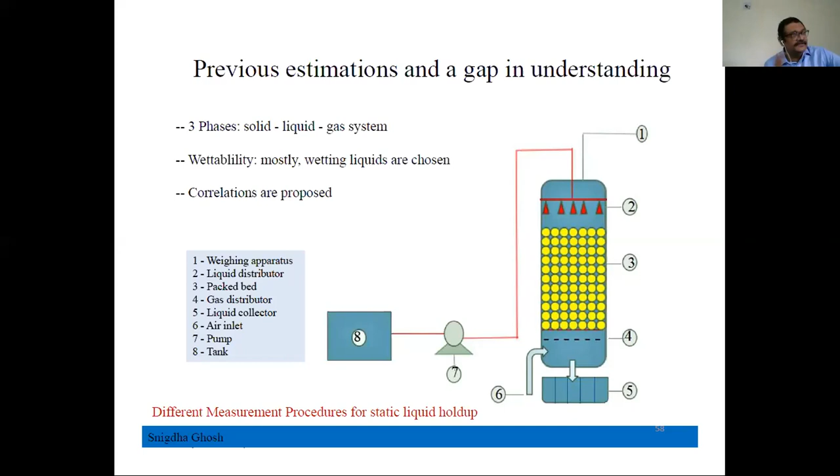We wanted to understand this, and people have not really understood these things, including chemical engineers. So we said let us look at it from - this is from an academician's perspective, please understand that.

To understand that complex system, we need to understand how much liquid can be held between two balls. This is an experimental system where I have two balls, of course alignment and those things are issues, and then using a micro syringe you keep injecting small amounts of liquid to find out what is the maximum amount of liquid which can be held between these two spheres. That is what we did.

You can also change the orientation, rotate this, and find out at this orientation what will be the liquid, at this orientation what is the liquid, and do these experiments. This is easy to do with water and balls, glass balls, or wax coated balls.

It is very difficult to do these experiments at high temperature using slag and graphite balls. It's much more difficult, but we can use the techniques of mathematical modeling to see what will happen in case of metal and slag.

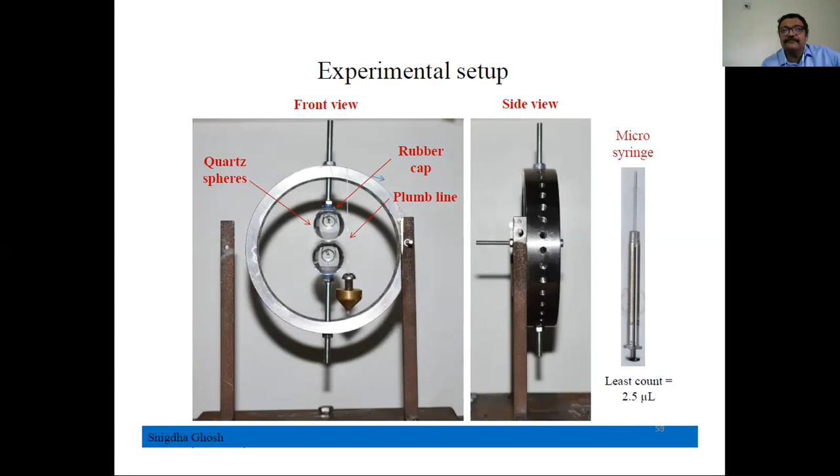We also did mathematical modeling. This was a tough modeling exercise where you start with the surface, that means the liquid film, and then do so-called energy minimization. There is an interfacial energy, there is a contact angle, and gravity acting, all those things. So you do what is known as minimization of energy.

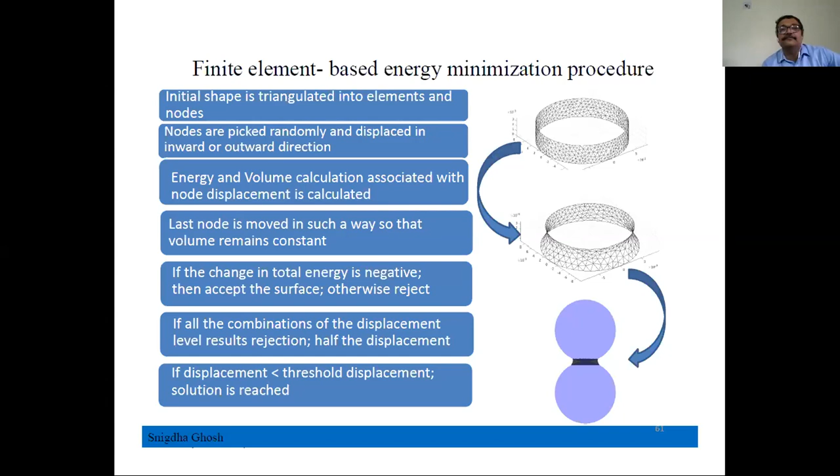What we do is randomly change one node, find out the energy, change in energy, and iteratively do that. It needs a lot of parallel processing, computationally very intensive. So we did a lot of parallel computation, and I can tell you this is one experiment.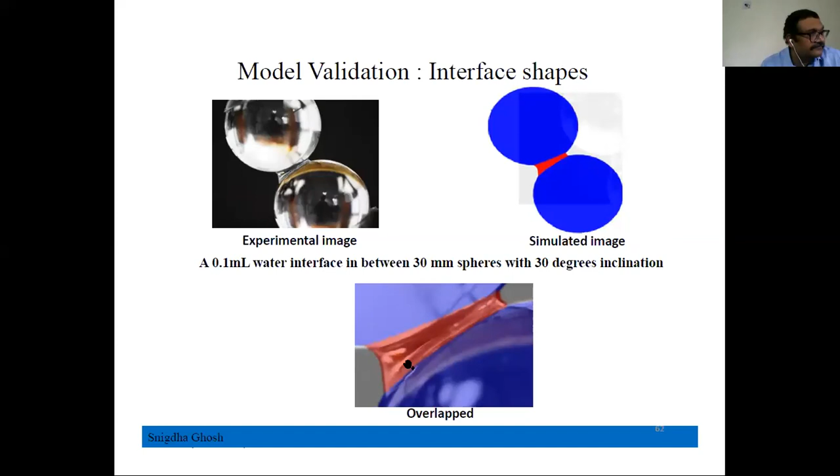Inclined, I don't know what is the angle, 30 degrees, yeah, and you can see the water film. This is simulated using the principles of surface tension and contact angle. These are the only values we use, and you see how good the fit is from the simulation as well as the experiment. Both are actually exactly matching. That means now we know from fundamentals how to predict.

This can be extended if I change the surface tension for metal, slag, all those things can be done. Depending on whether the contact angle is good, it is going to form a film which is not like this, it is going to flow like this. So many fundamental things can be explored, but I'm just telling you how the techniques of mathematical modeling can be used.

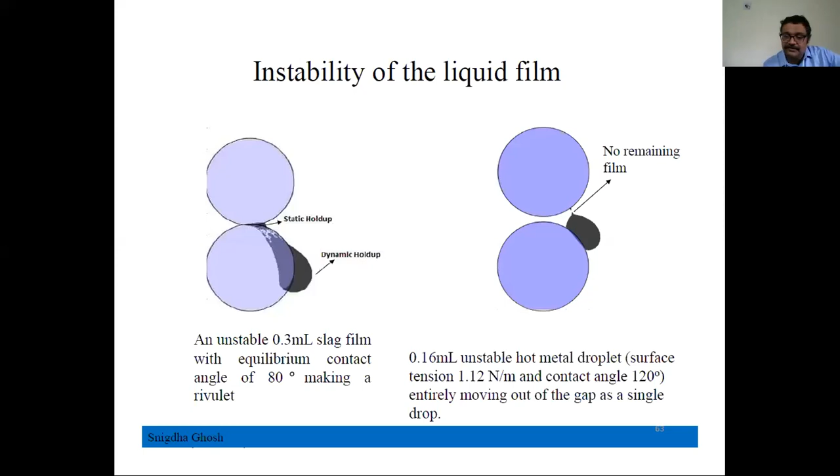Then we did experiments at different orientations - vertical, 10-degree angle, 30-degree angle, even up to horizontal. We measured experimentally what is the hold up, and you can see that whatever we predict using the model is very well matching with what we found out experimentally.

Of course, there are more complex issues. What will happen is the actual hold up will be less than that in the packed bed, because this can be extended to packed bed, since packed bed can be thought of as a distribution of these different orientations. So we can extend it to the packed bed and find out the hold up. But there is a problem here.

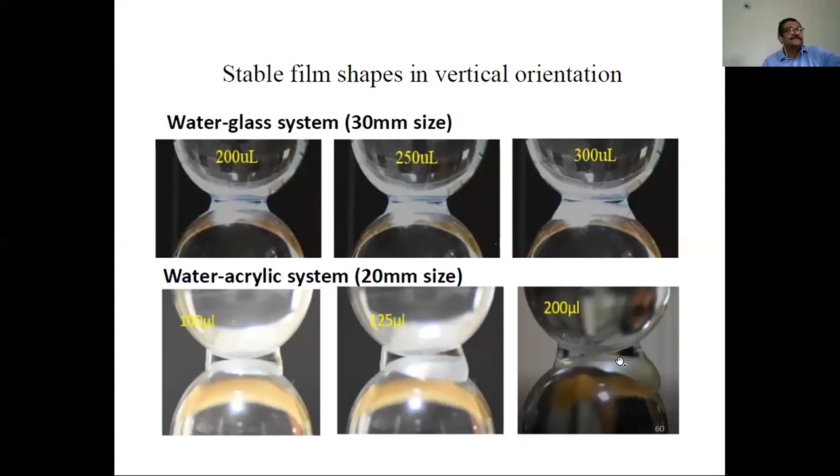What happens is, in an actual packed bed, once the liquid forms, it will drip out. When it drips out, some part will pull back and some part will fall down. So actual hold up will not be maximum, it will be somewhere in between the maximum and what was pulled back and remained.

If no liquid really falls down, if it all stays there, that is the maximum. But the actual one will be between, this is the lowest. So somewhere in between, and that depends on if you shake the bed, it will be different. But we could come out by saying what will be the hold up and what are the fundamental principles which govern this hold up.

This will soon be published again in a metallurgical transaction. It is accepted but not yet published, so it will be coming soon. This is a PhD work by one of my students.

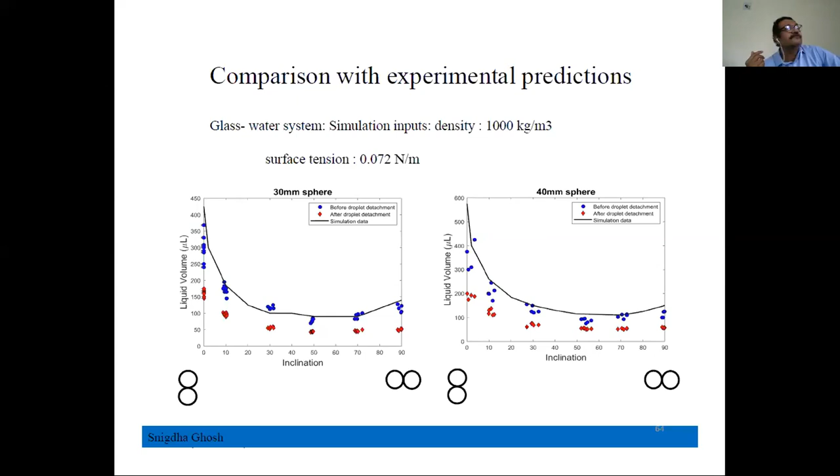So I think I will stop here, because I have some more studies. Just to tell you, this is done by one of our Chinese students. I did it with Professor Seetharaman, where she was trying to inject CO2 into an iron chromium carbon melt.

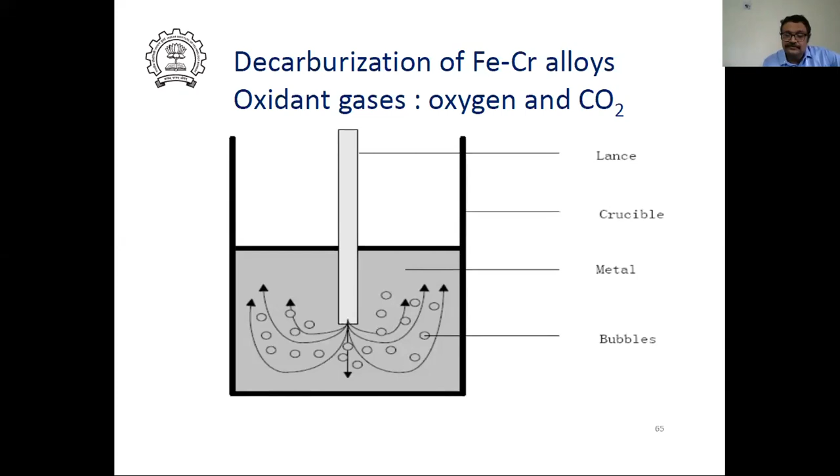She did a lot of experiments in an induction furnace, very tough experiments. Tough means dangerous experiments, injecting oxygen and CO2 into liquid steel in a laboratory setup, but still it can be dangerous. The idea was, is it possible to oxidize carbon in preference to chromium, since that's a problem with stainless steel making. So using CO2 could reduce the chromium oxidation. That was the whole idea.

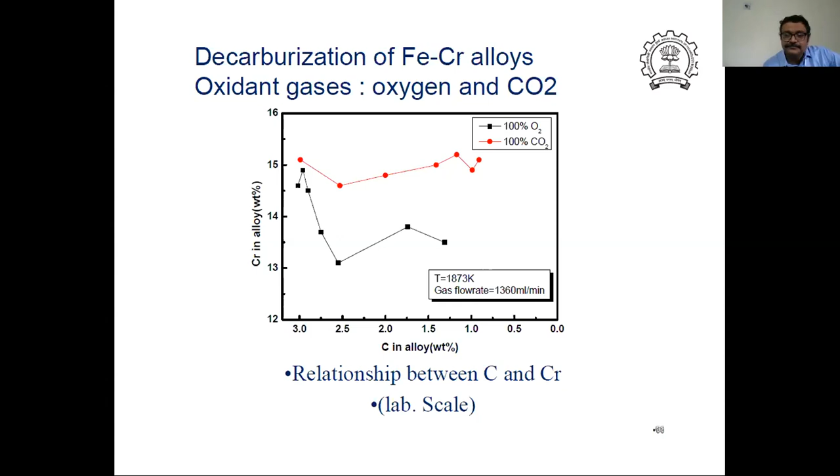So again, we did experiments, we did modeling, and there are a lot of modeling issues involved, how a bubble travels and how the chromium travels around it and all those things. I'm not going into the details, but what I wanted to see, this is actually carbon, this is chromium.

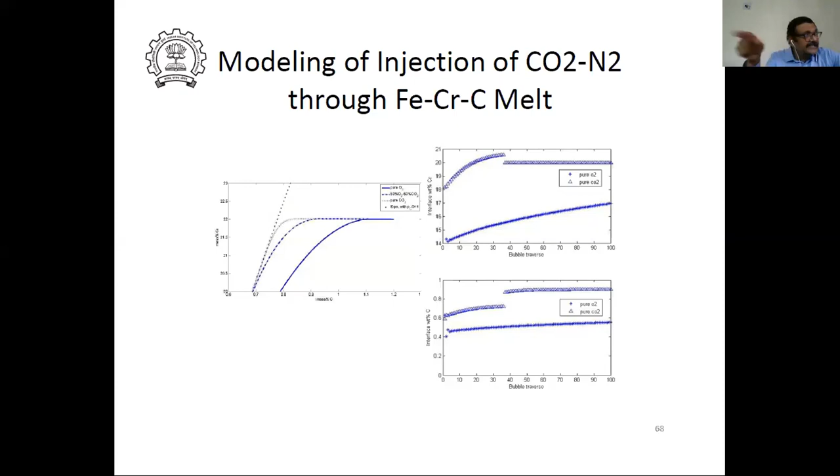So again, what I'm trying to say is, of course these are some 12-13 years back laboratory ideas with some modeling. But now the Chinese are able to scale it up, and they are able to come out with ideas, and some of these things, how nicely they are able to take it. It is also important that we work together, academicians, industry, technologists, whoever, all those people. And we have to put money and effort wherever, and work for 10-12 years. Then only we will start getting technology. It is not going to come in 1 year or so. So we need to have such long-term plans if we want to be really innovative. It is not going to happen just like that.

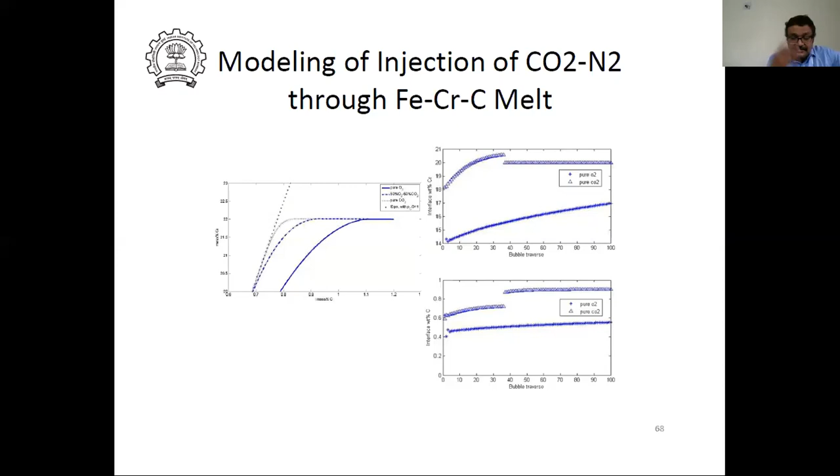Okay, so with that, let me just end my presentation. I have many more slides. Just a concluding remark by saying that neither modeling alone. We have a habit of stamping someone, oh he's a modeler, he's an experimentalist, he's an operator. I don't think all those things serve the purpose. We all actually do modeling as well as experiments.

So that way, neither modeling alone, because if you do only modeling, it is building models in air, nothing else. Nor performing experiments without quantitative focus, just experiments to perform, it increases, it decreases, blind experimentation without quantification, without looking deeper. You need a quantitative outlook, and through that you conduct experiments that will be more fruitful. So neither modeling alone nor performing experiments without quantitative focus will be a scientifically fruitful exercise. It is a judicious combination of both that is required. That is what at least my 22-23 years of experience has taught me. Thank you very much.